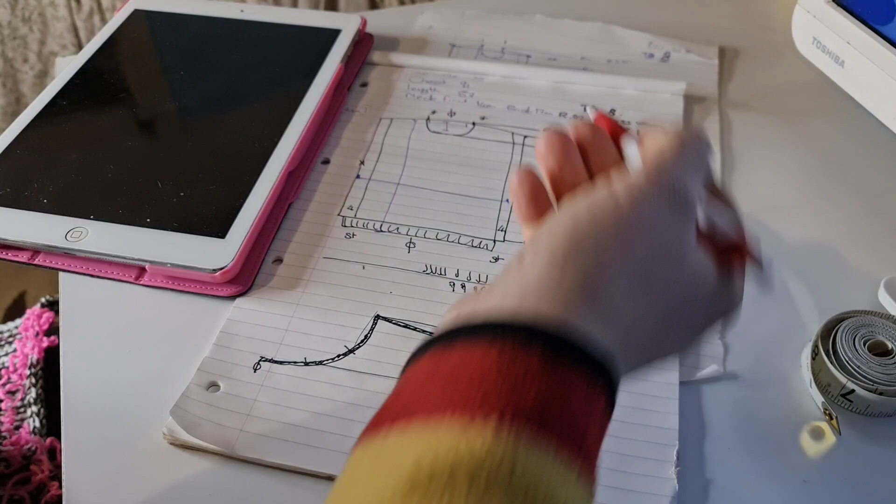Right, so what I really need to do now is turn that into how many stitches per 1 centimetre, which is quite easy. We put a decimal point in between the two. So 22 rows to 10 centimetres becomes 2.2 rows to 1 centimetre, and 1.5 stitches equals 1 centimetre.

Earlier on we took the measurements of my beautiful daughter, who's going to be the model for this, and we found out that her chest is 91 centimetres, the length of the garment is 57. We've measured the back width of the neck, the depth of the neck, depth of the armhole, and the amount of drop I want on the shoulder. It's quite simple when you work it out.

Now then, I just need to switch on my calculator on my device.

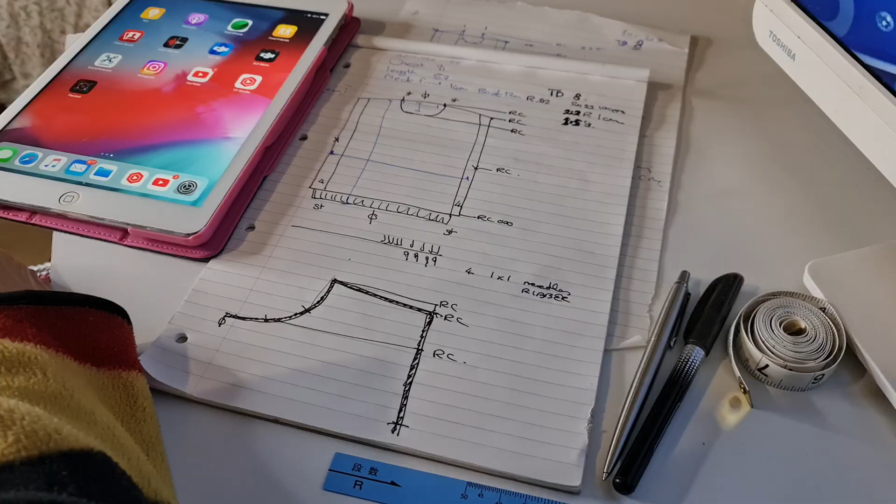So we know her chest measurement is 91 centimetres, but we need to add some ease. How tight do you want it, Lil? Do you want it loose or tightish? Medium. Medium. So we'll add, for a loose fit, we'd add 4 inches or 10 centimetres. Put that there so everyone can see.

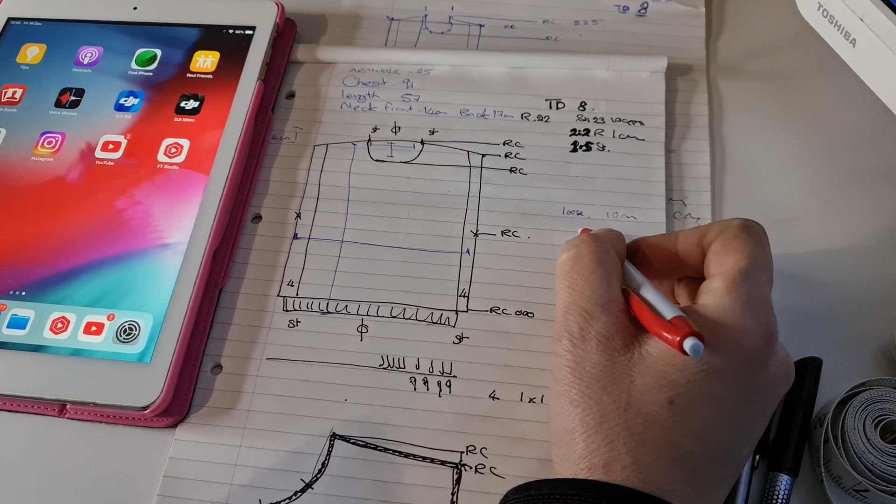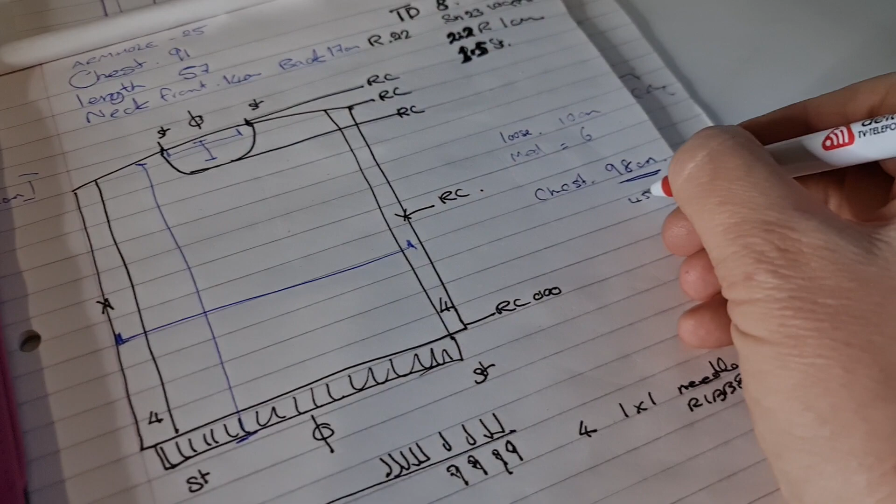So for a medium fit, I would say we'll add, let's have a look what 6 centimetres looks like. Now that's 6 centimetres if you want it medium to well fitting, because it's going to be a bit stretchy anyhow - this fabric's quite a nice give to it. So we want to add 6 centimetres, rounding up to 92 plus 6 for ease of maths is the chest measurement. I'm going to make 98 centimetres. So we know that's the whole width around, so we need to do half of it because we're doing a front and a back. So half of that is 45 plus 4 is 49. So the width of my jumper from side to side, including the ease, is going to be 49 centimetres.

We know the length she wanted was 57. So I'm going to add a little bit of ease because when it pulls around the body, we'll add a centimetre. So we'll want that from the nape of the neck down to the base of the cuff or the welt to be 58 centimetres.

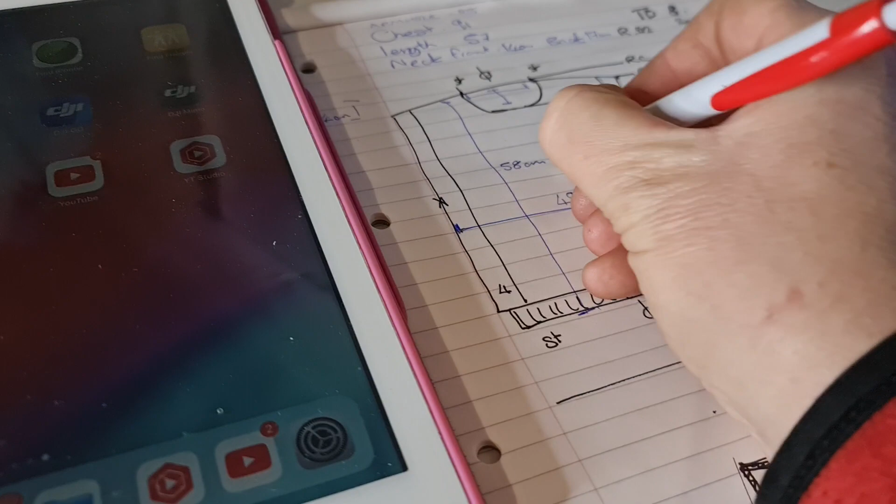Now the neck from front to back, let's see, the front depth here is 14 centimetres, and the width she wanted is 17. So we'll write 17 in there.

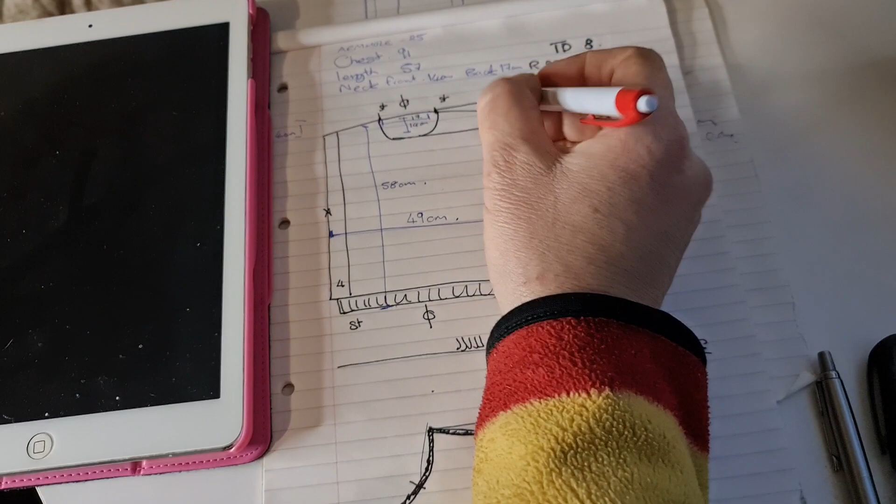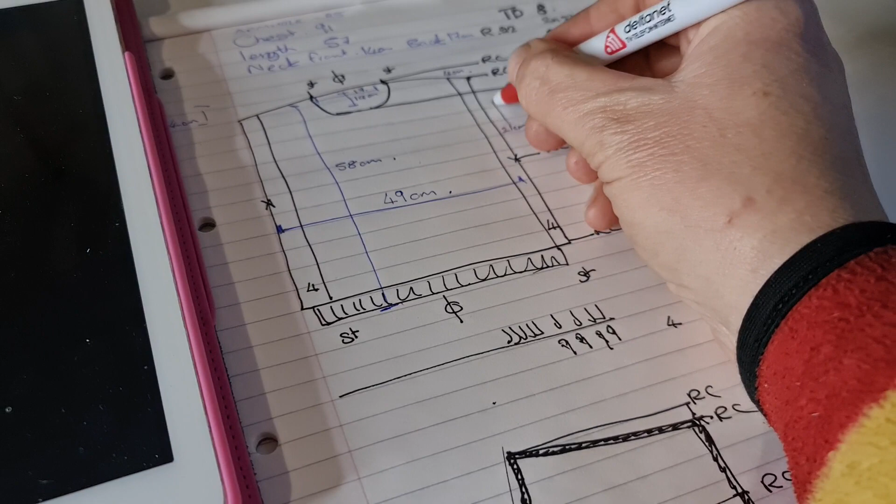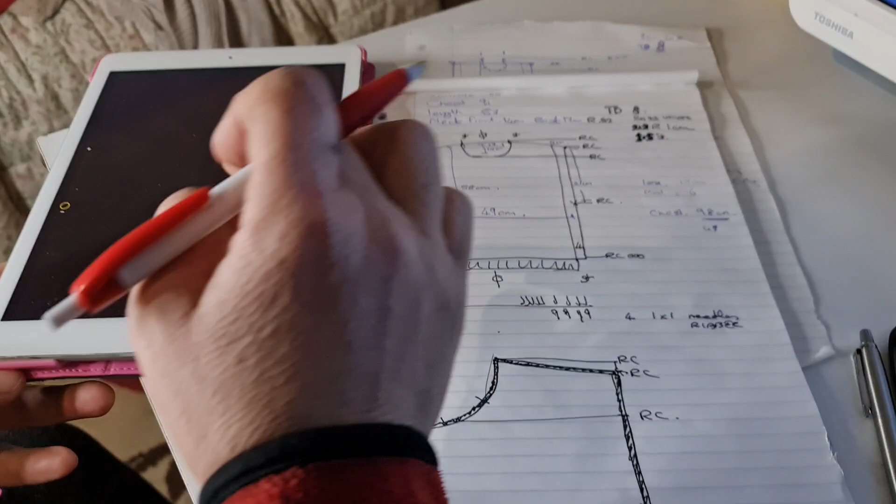We have all our measurements now, so all we need is to switch on our calculator that I've just freshly downloaded on my iPad, hopefully. Where is it? Let's have a look. We'll start with how many stitches first.

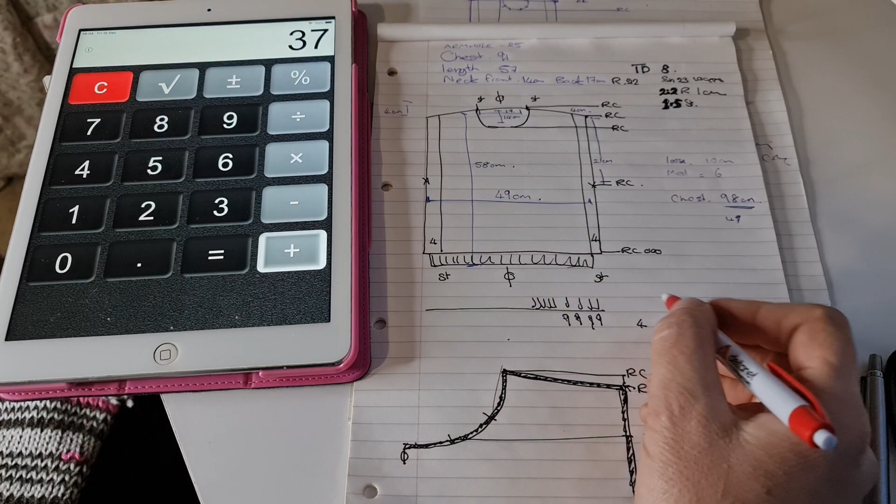We know the width of the garment is going to be 49 centimetres on the one panel, so we need to do 49 centimetres times 1.5 stitches. That's equal to 73, so we'll call it 74 stitches. Half of 74, divide by 2, is 37. So that tells us we need 37 stitches cast on.

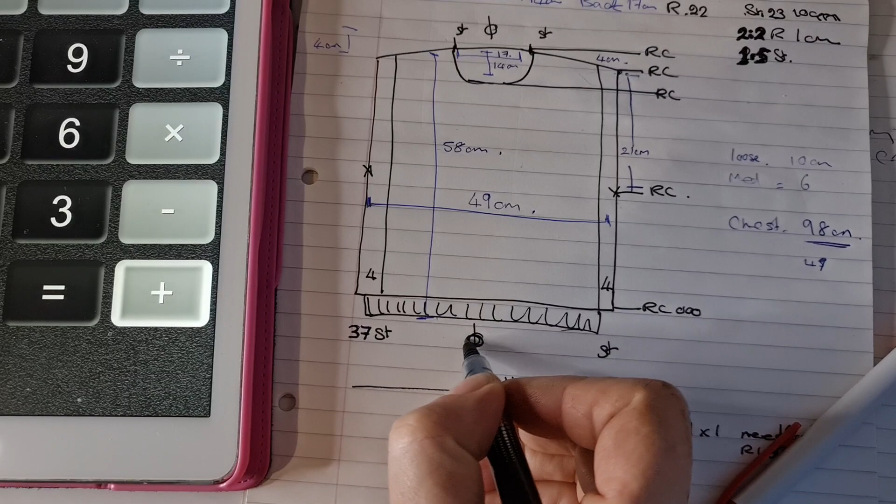Let's do this in black. 37 stitches each side of our centre zero point is our cast on.

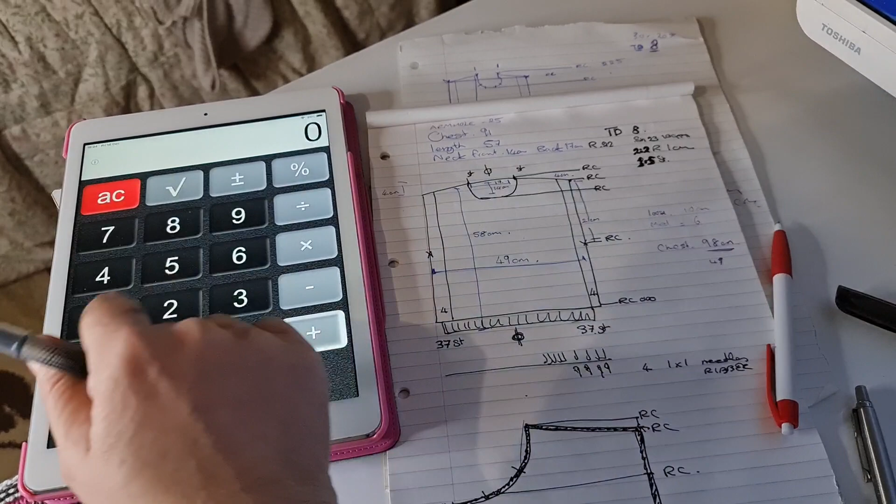Next, let's check out the width of the back of the neck, because we're doing the stitches for now. She wanted it 17 centimetres wide, times 1.5 stitches equals 81. That seems rather a lot, let me just double check that. 17 times 1.5 equals 25.5, I thought I'd made a little mistake there. So we'll call it 26.

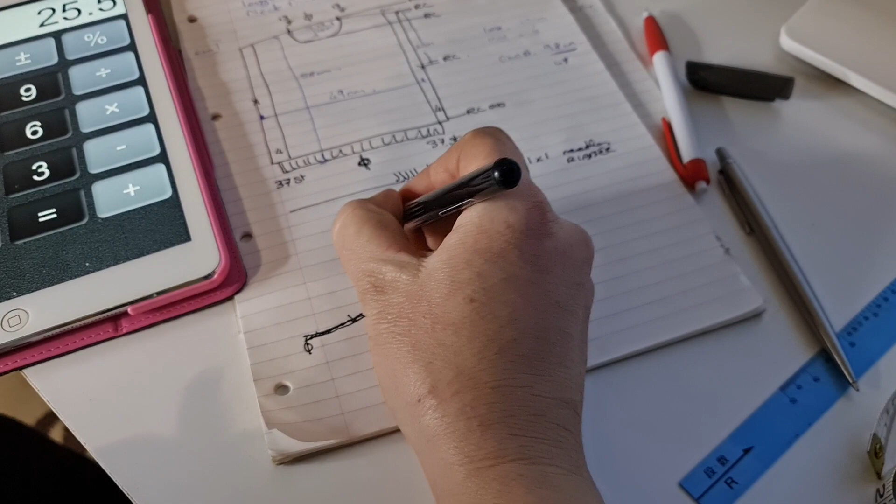So that gives us 13 stitches either side of the back of her neck, which is going to be the final width of the neckline. Now the depth, let's see, that's everything, and we put that here. So this is the neck, exploded neck - exploded neckband, that's good isn't it? That's the centre point.

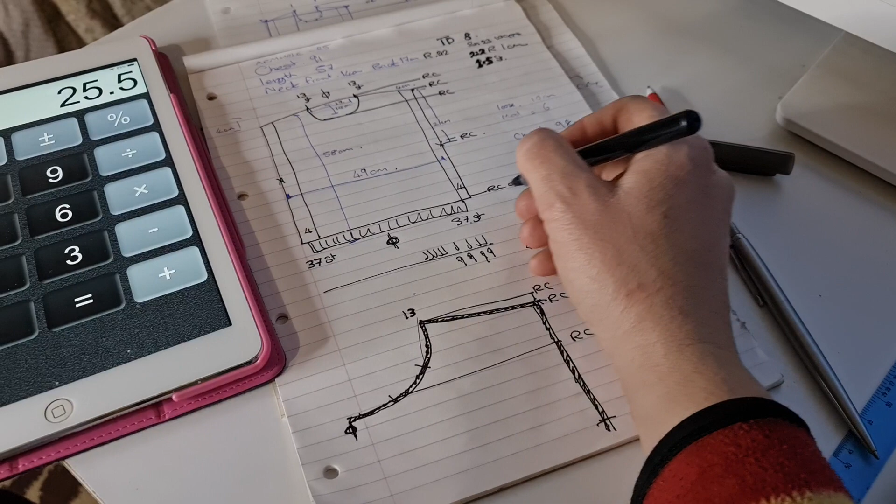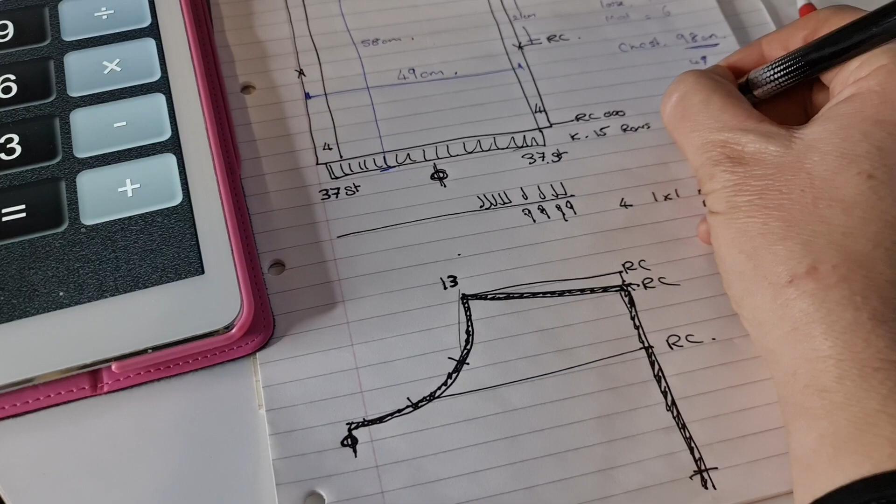Going back to this, we're going to cast on 37 stitches and we will knit. Did you like the depth of the rib before? How deep would you like your rib? Let's see, should we do it? 15 rows of rib. We'll knit 15 rows of rib, because I think that's quite a fair amount.

Then we transfer all of the stitches up, but this design here, if you look, this is my design for the garment itself. It's going to have 4 of the 1 by 1 - it's a 1 by 1 rib, so let's put 1 by 1.

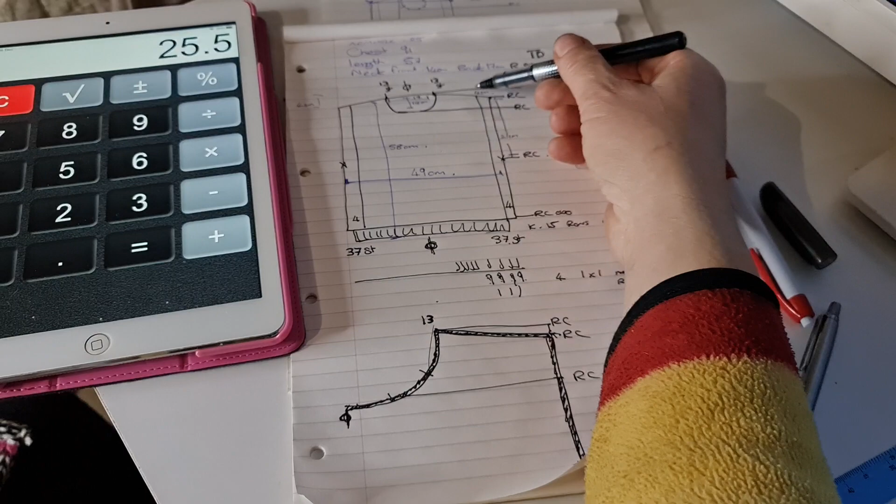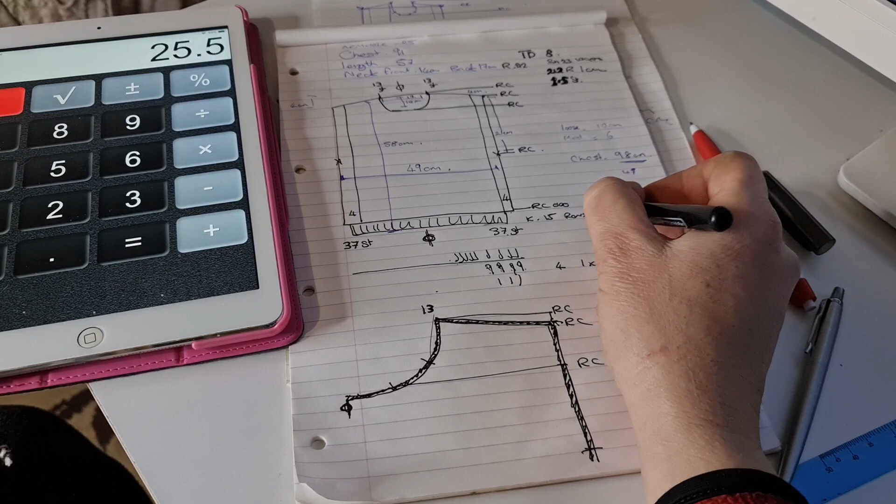4 needles at the bottom, 4 of the 1 by 1 bits, so that will be 1 back here, 1 back here, 1 back here. I want to leave those in pattern, so along the side here we have a small piece of ribbing going the length of the garment. So when we transfer all the stitches up here, transfer, we will leave this pattern of 4 either side left in work on the ribber, and we will leave the ribber connected and knit it as a rib.

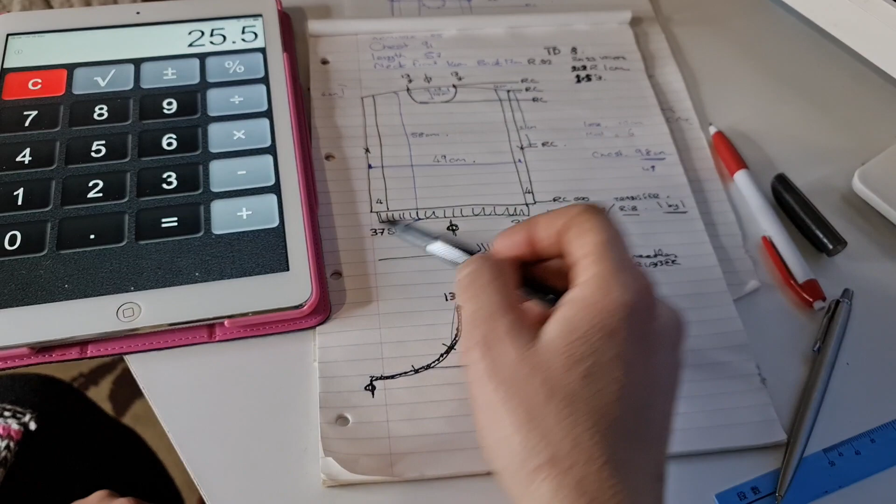Right, now we know everything we want. Now we want to know how deep, so let's have a look. She wanted it 58 centimetres. Back to the calculator, 51 centimetres times our row measurement for 1 centimetre is 2.2. So we go 2.2 equals - let's just double check that - 51 centimetres times 2.2 equals 112 rows.

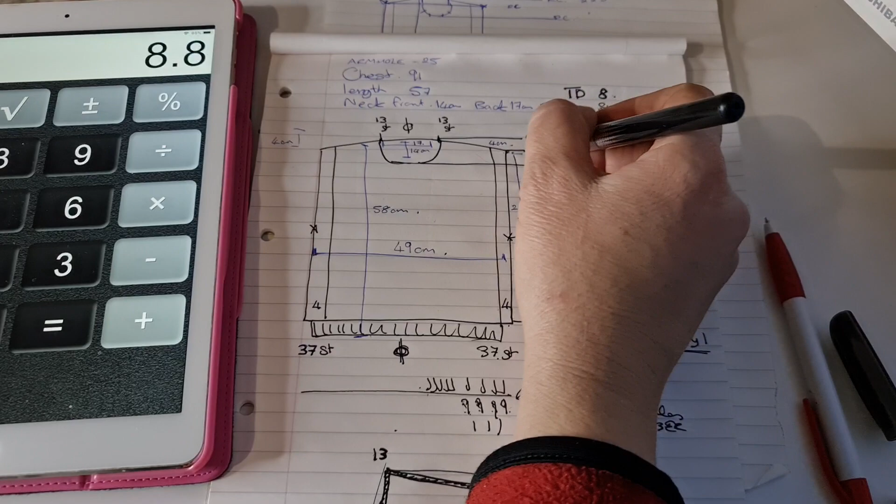So the total at the end of the nape of the neck is 112 rows. Now I know I want a 4 centimetre difference, the slope here, so let's just do 4 times 2.2 equals 9 rows, so we'll call it 10. So we'll stop knitting and start the shoulder decreases at row 102.

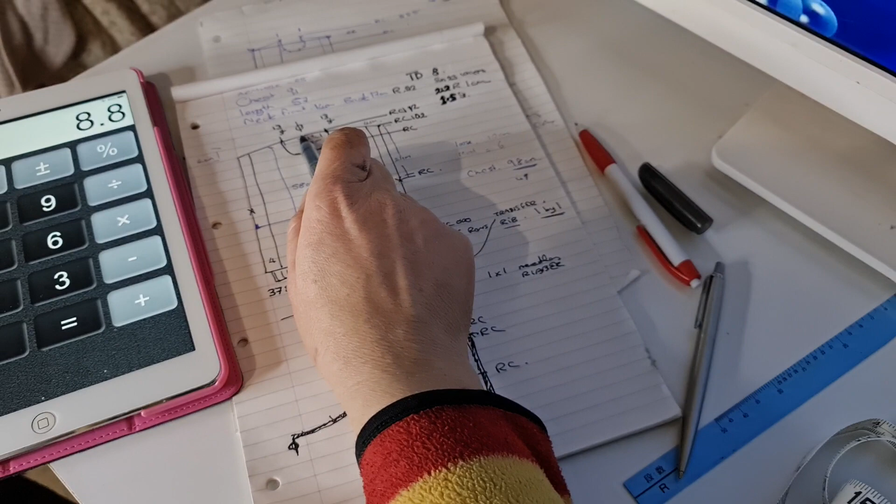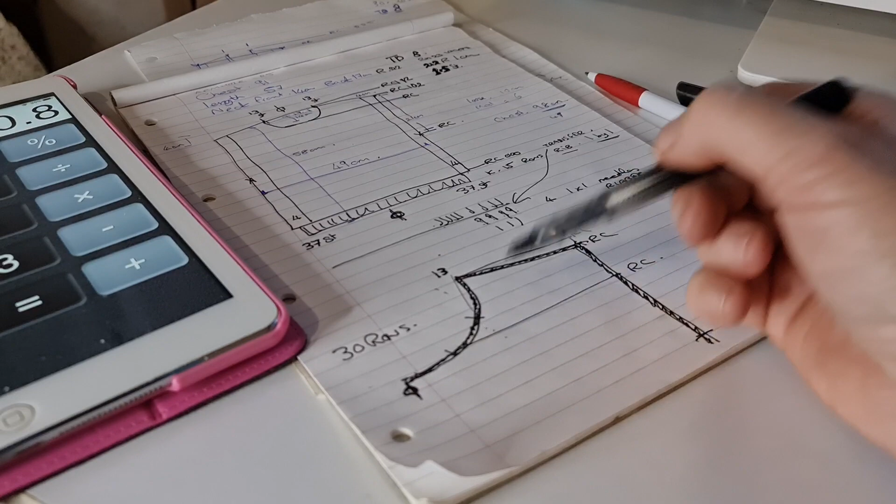Depth from the nape of the neck to the neck starting, 14 centimetres. So once again, 14 times 2.2 equals 30 rows. The depth of this is 30 rows, so I'm going to write down here 30 rows of neckband - you see, the neck from there to there. So we go to the exploded version.

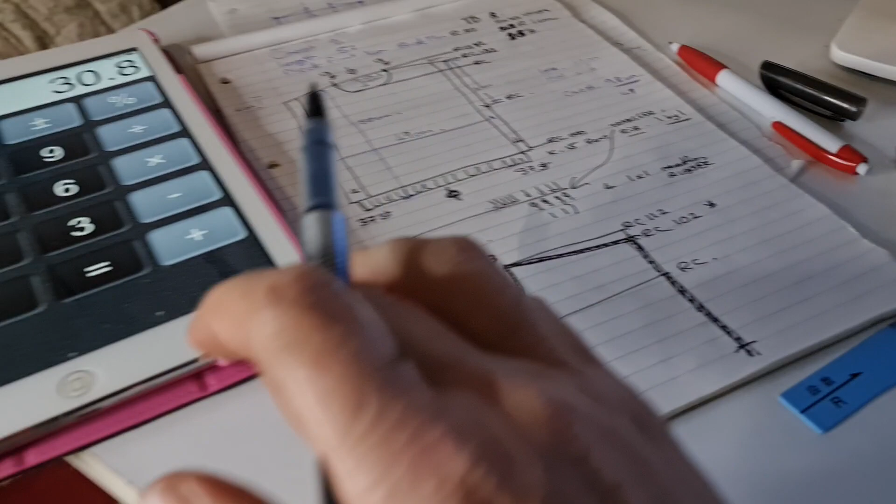102, that's the shoulder shaping, we'll talk about that there. And we need 30 rows, so we want 112 minus 30 rows equals 82. So we now know on row 82 this is the point the neck begins, neck shape.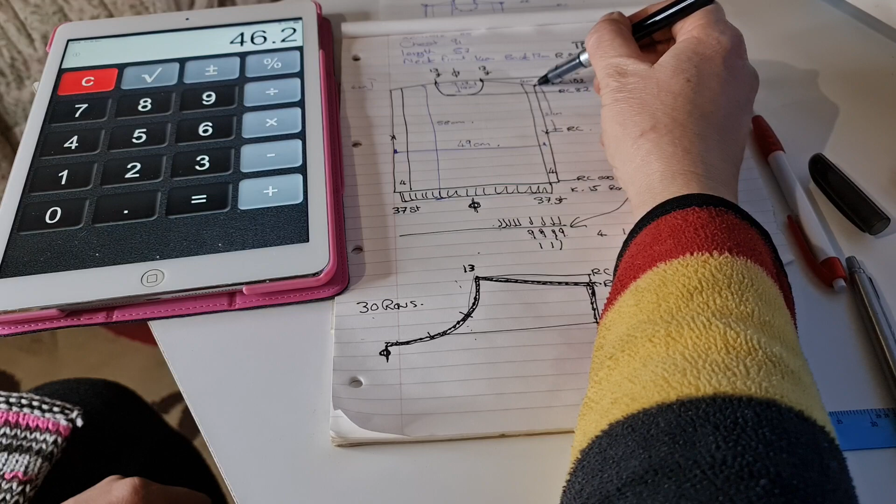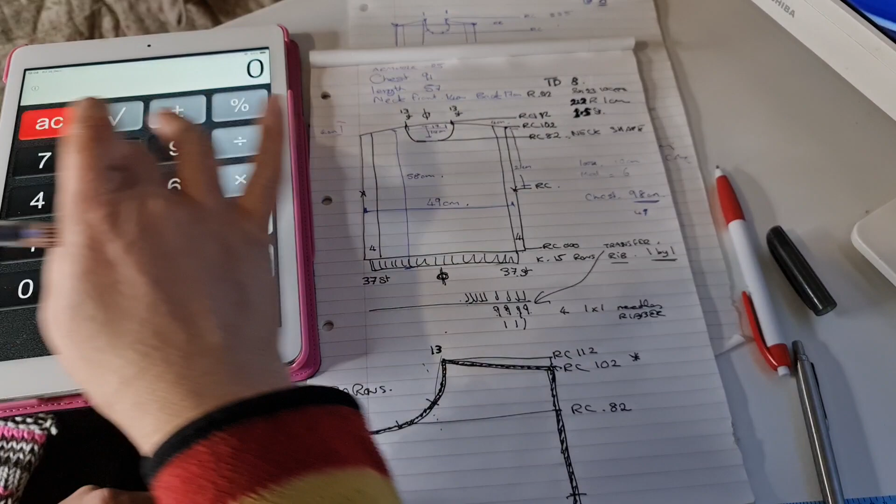21 centimetres down from row 102, she wants the armpit. So let's work out what 21 centimetres times 2.2 rows is: 46. So we know now that from the point of her shoulder down to the armpit is 46 rows. The point of the shoulder was 102, take away 46 - oops, I made a mistake. 102, take away 46 equals 56.

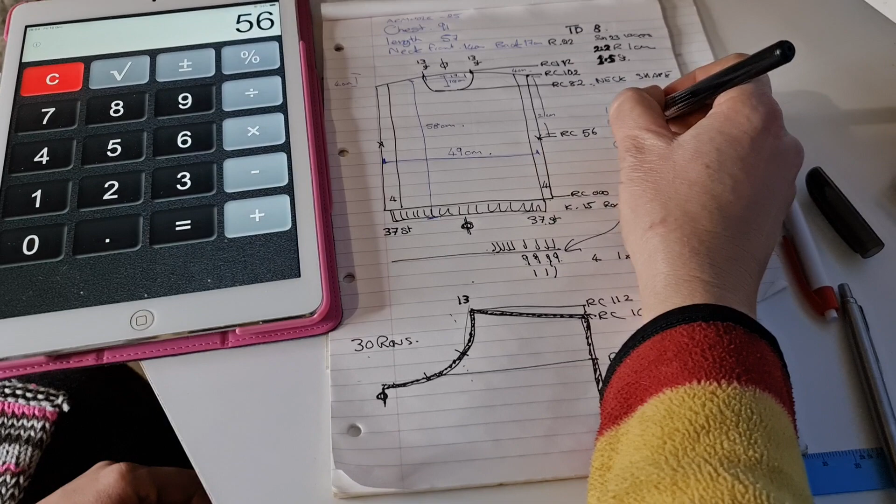So row 56, we're going to mark here either side. So we know when we're stitching it up, we're going to stitch up this piece only and leave this little piece open.

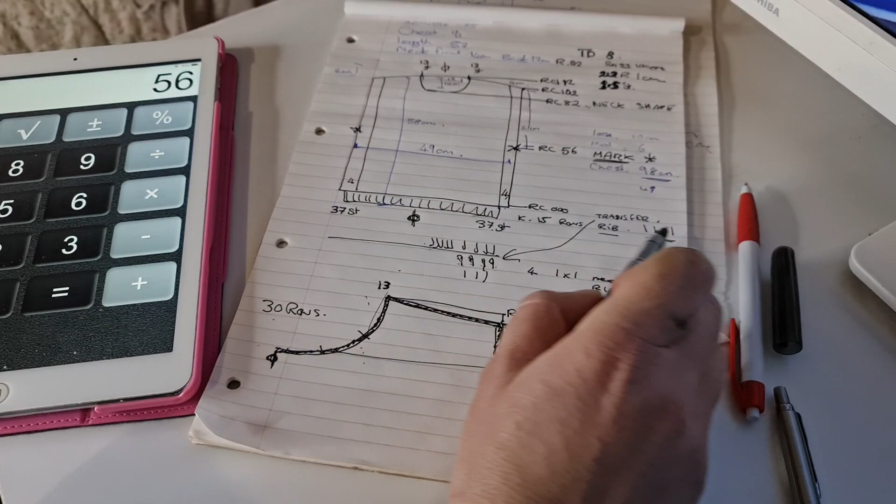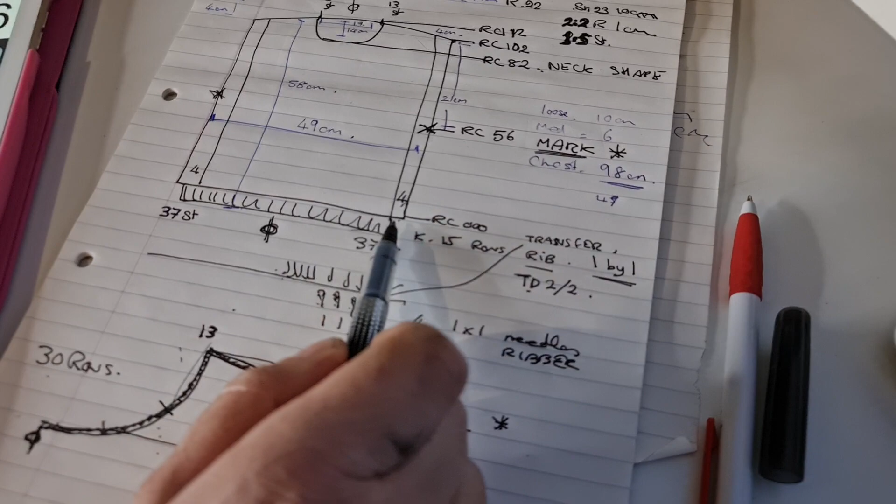Now, the neck shaping. So we now know we're going to cast on 37 stitches. We're going to knit 15 rows rib at tension dial maybe 2-2. We'll see - tension dial 2-2. Then we put the row counter back to 0 after transferring our stitches, leaving 4 in work and leaving the ribber connected. And we will knit over those 37 stitches each side at our tension dial 8.

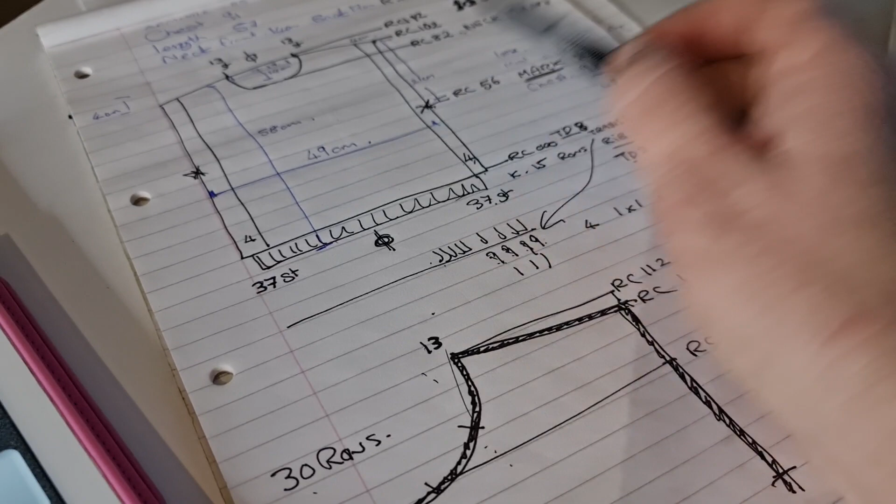Up to row 56, on row 56 we put a yarn in each side and mark so we know our stitching up point. We continue knitting the back until we get to row 102 where we start our shoulder shaping.

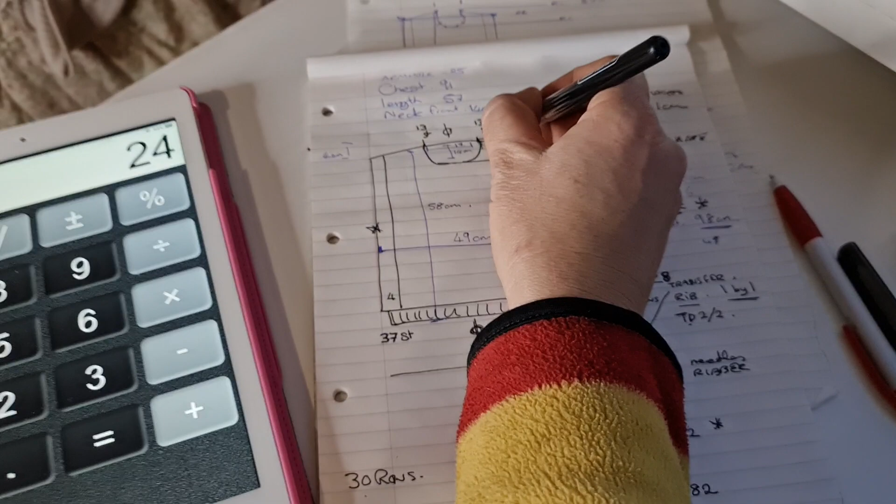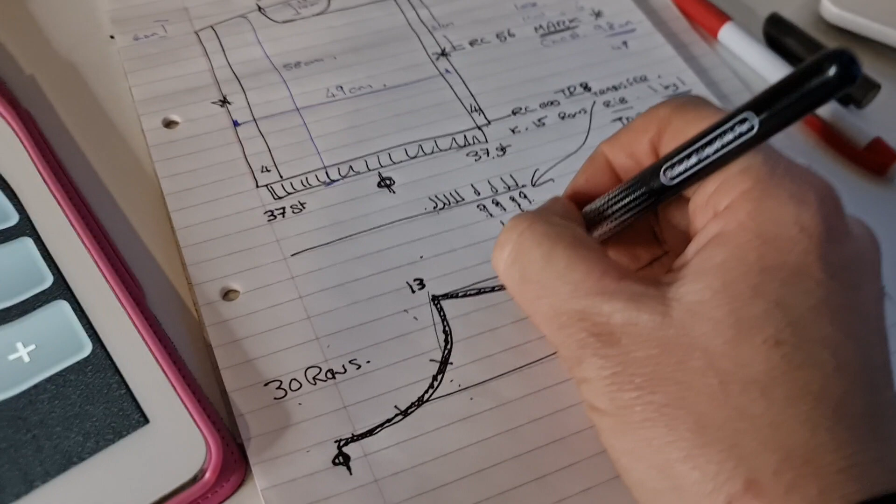Now then, I need to know how many stitches to do the shoulder, from here to here. So let's work that out. 37 stitches we know we started with, and we're going to take away 13 stitches, which leaves us a total of 24 stitches to get rid of in how many rows did I say? 10. So let's put a little note down here. We've got - no sorry, 24 stitches.

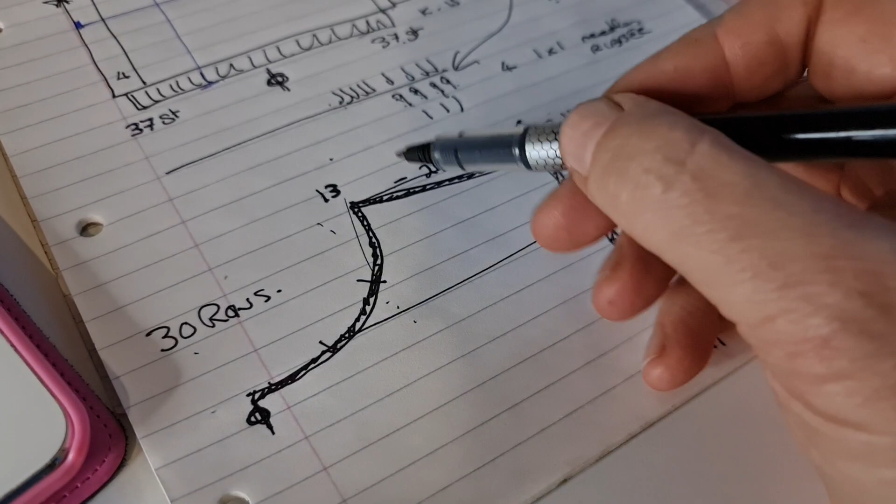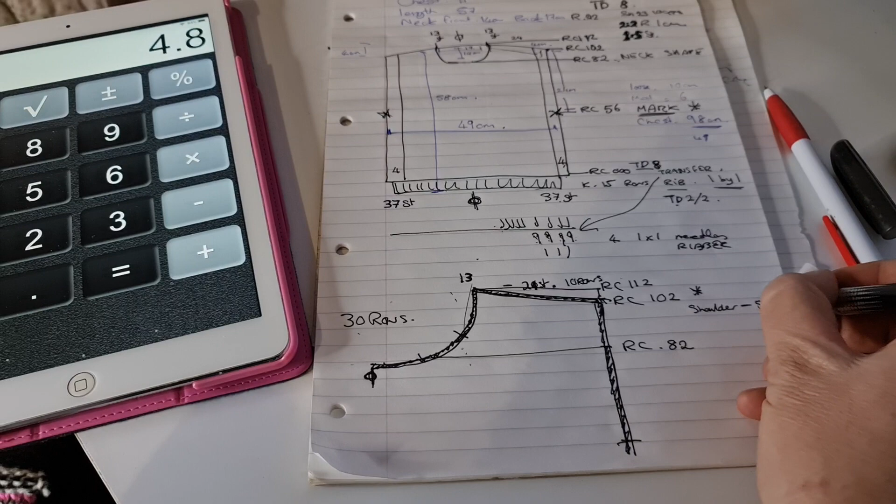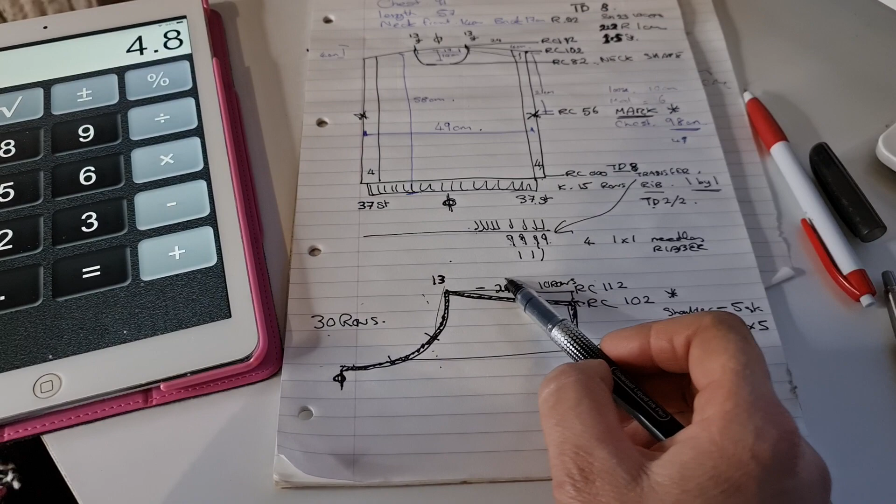Minus 24 stitches in 10 rows. So I'm just going to divide that up. We'll do 24 divided by 5 equals 5 nearly. So what I will do is put into holding position. So for the shoulder shape, minus 5 stitches, knit 2, times 5. Now on one of them it's going to be less at the end, so we're going to have 5, 10, 15, 20 and 4. 5, 10, 15, 20 and 4. Yeah, that will be right.

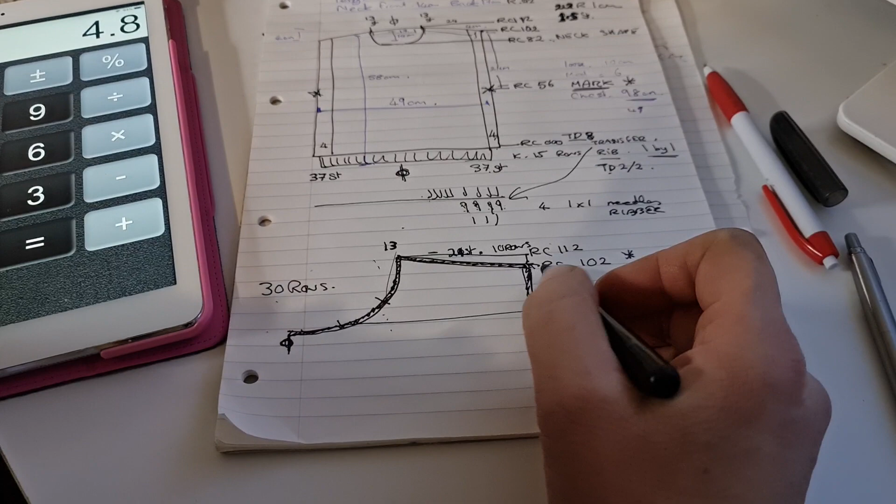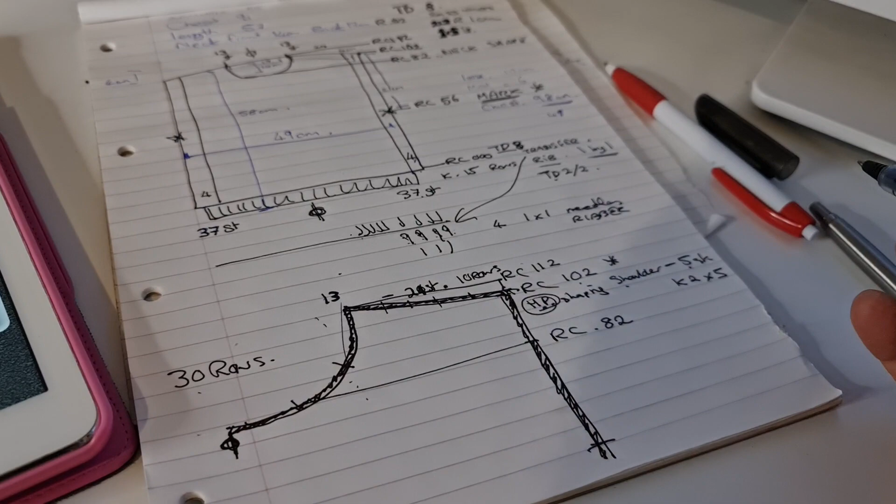So just to recap, on row 102 we're going to put 5 stitches into holding position, so we're going to do holding position shaping: 5 stitches, knit 2 rows, 5 stitches, knit 2 rows, 5 stitches, knit 2 rows, and on the last one we'll be left with 4, and that will give us a nice shape in holding position, and I will show you how to do that.

Let's get on with this neckband.

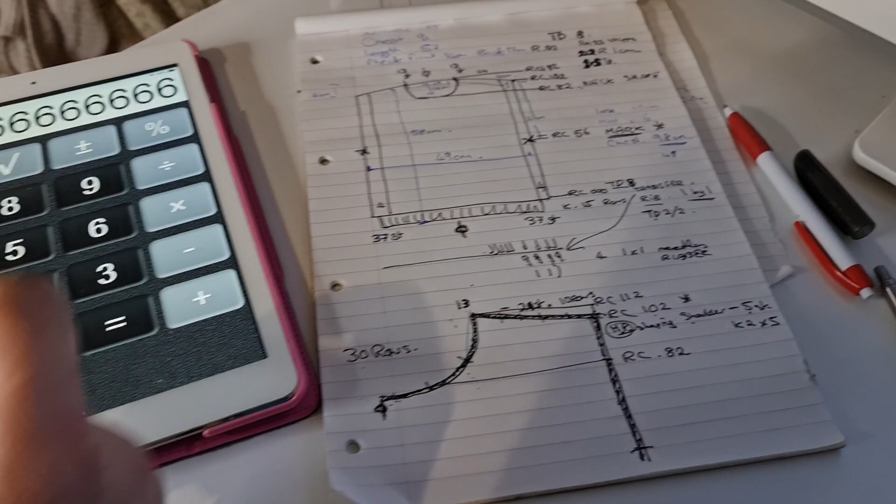Now then, to do the neck, I like to work in 3s around a neck. So we know we're getting rid of - no sorry, 26 stitches. So let's straight away start by dividing 26 by 3. That's about 8.6 stitches. So in the beginning, I am going to take away on the first bit here, 8.

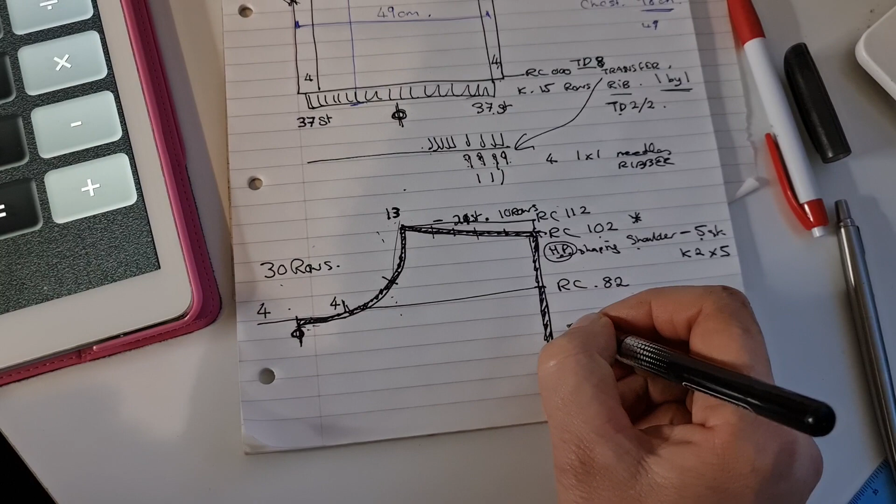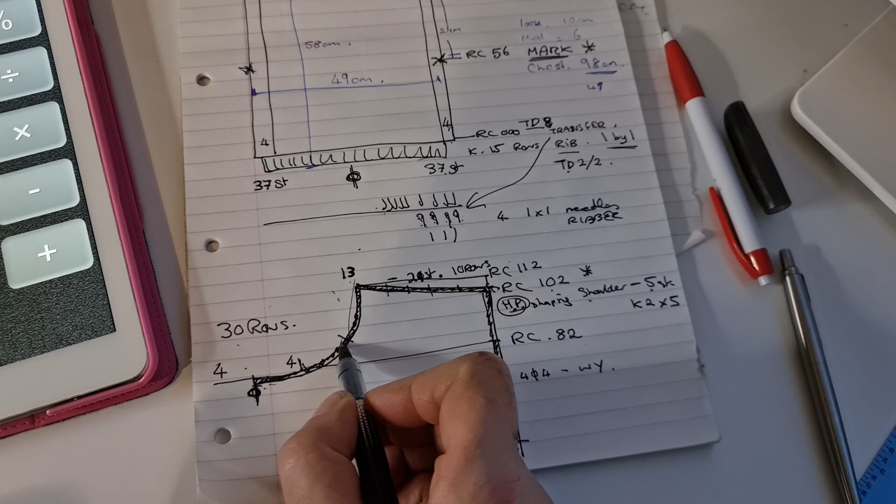Let's put 8 stitches, so that's 4 each side. We're going to go into holding position here. So first on row 82, so 4 each side of center, waste yarn. Next, we've got another 8 to remove here, I think. Let's see - yes, so 4.

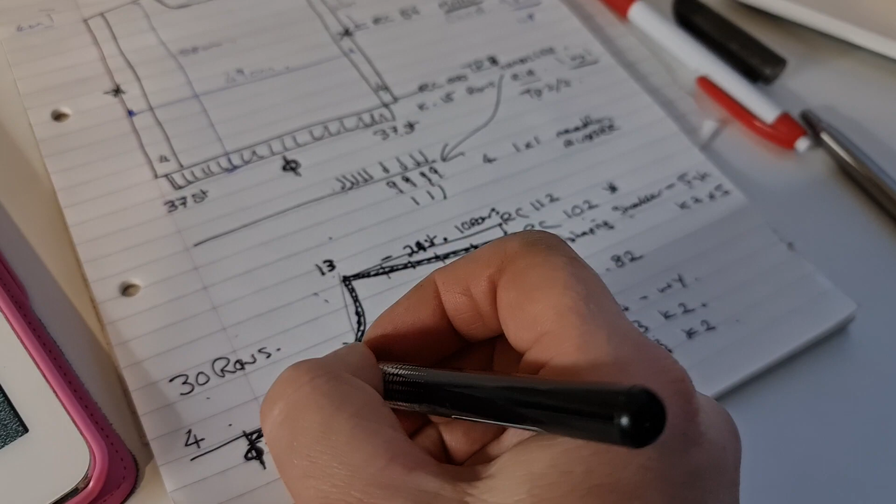What we're going to do is take them off quite steeply firstly. So we'll go minus 3, knit 2. That's 4, 5, 6, 7. Minus 3, knit 2. 7, 8, 9, 10. That's looking good, so that leaves us - that's this piece done. So we've got a sharp decrease here: 3 and 3 have gone.

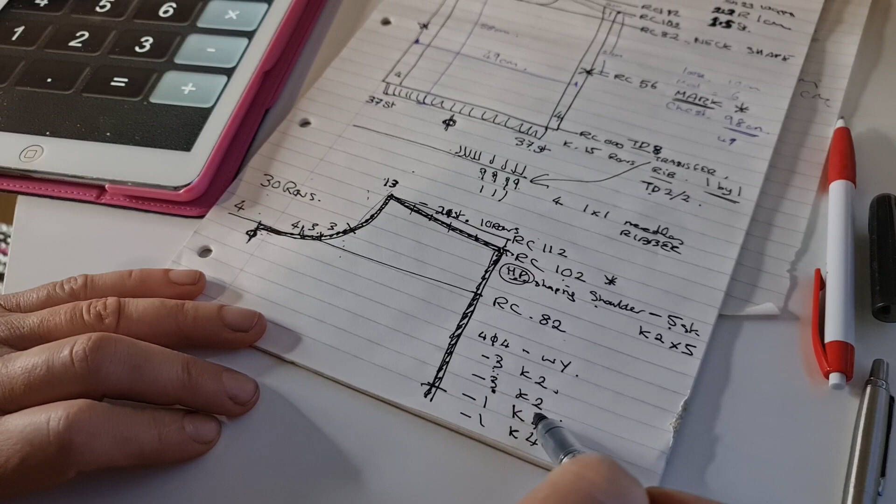That's going to leave us - what did I get to? 4, 5, 6, 7, 8, 9, 10. 3 stitches to remove. So then we're going to do minus 1 stitch, knit 4. Minus 1 stitch, knit 4. Let's just check how many rows we're getting rid of here, because we've got 30 rows. Let's see, 2, 4, 6, 8, 10, 12, 14. This is good. So minus 1 stitch, knit 4.

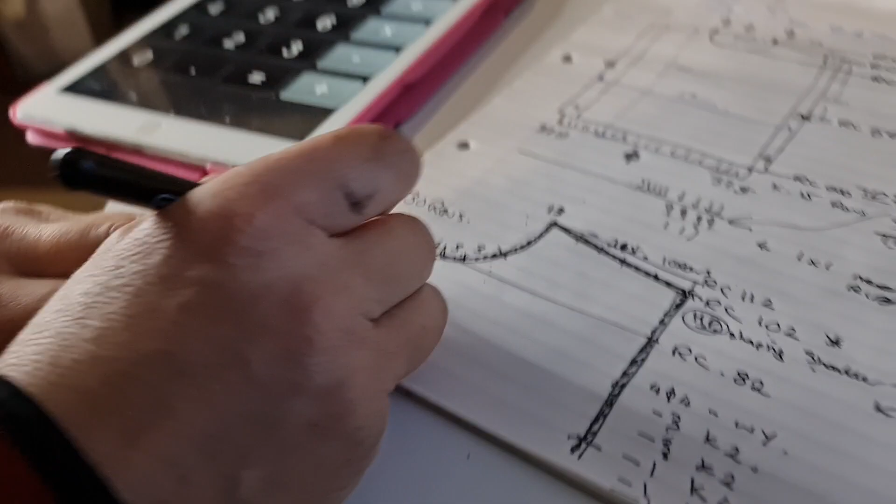So there we go, that is my neck shaping. So let me write that clearer for you. In the center, on row 82, we're going to take away 4 each side. On row 80...

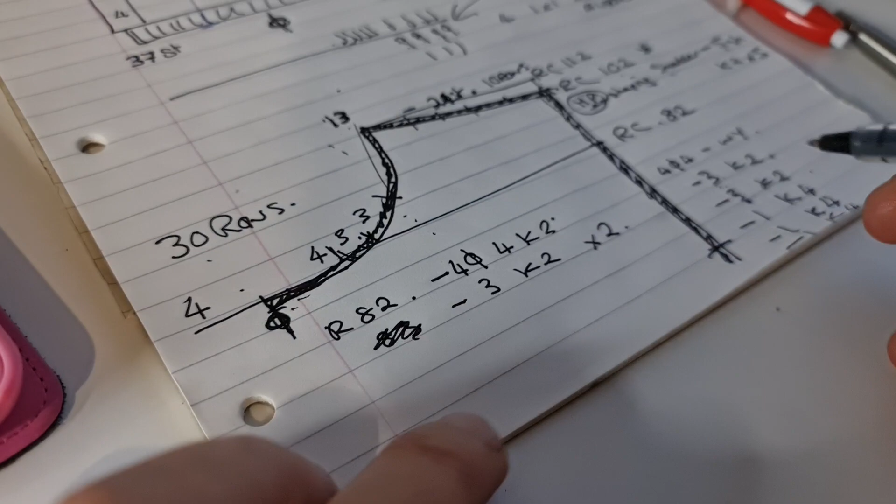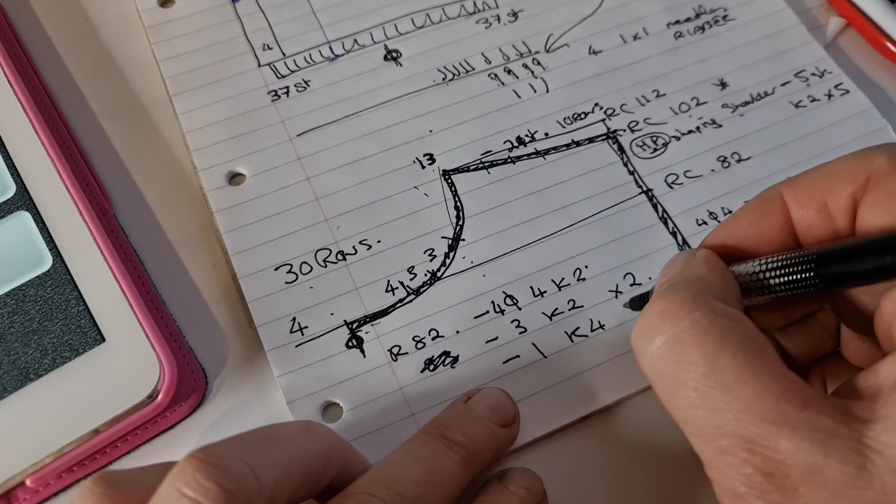Let's see, next one, 83, we're going to minus 3, knit 2, and we're going to do that 2 times. Let's see, we're going to knit 2 there, take away that bit. So that's 4, 5, 6, 7, 8, 9, 10. Then we're going to go minus 1, knit 4, 1, 2, 3 times, times 3. And that will remove 4, 5, 6, 7, 8, 9, 10, 11, 12, 13 stitches. That is a total of minus 13 in total.

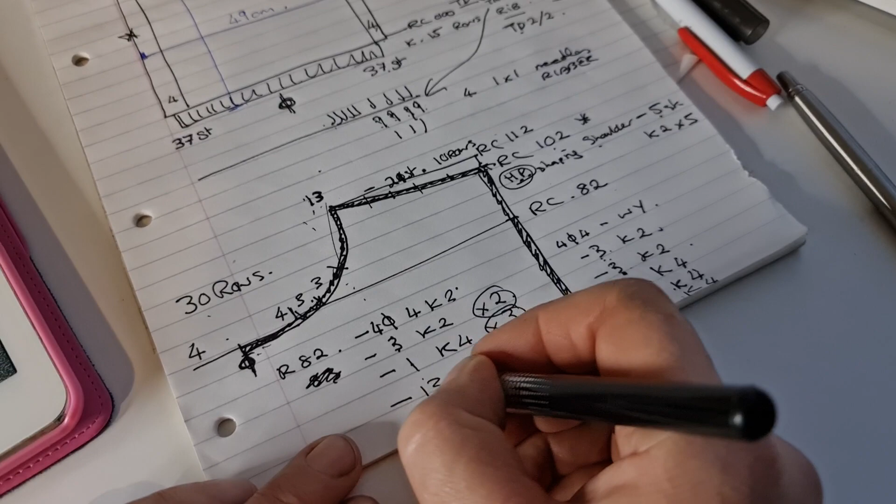Once we've finished that, we're going to continue knitting to row 102, which is where the shoulder starts. Knit to row counter 102, and shape shoulder.

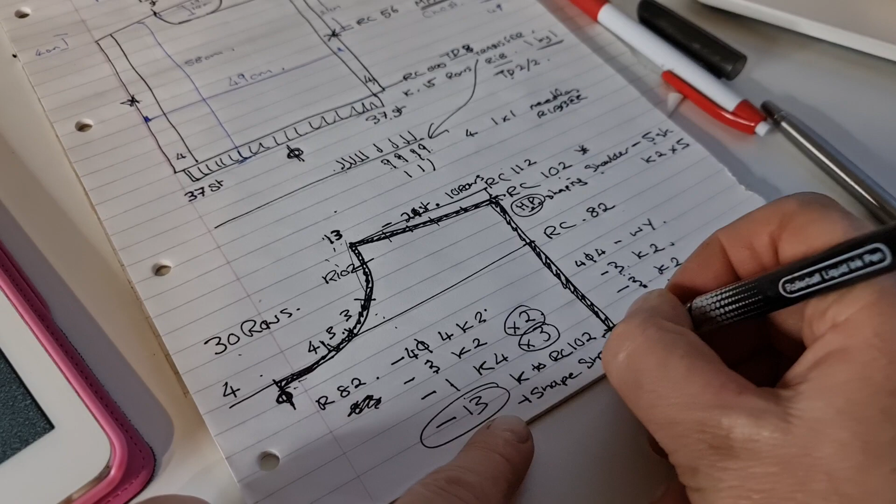Right, let me just go through this with my little head. We'll put it on pause and I'll check I've done it correct for you. So I've tried to write it a little clearer for you. I hope you get the gist of what I was explaining.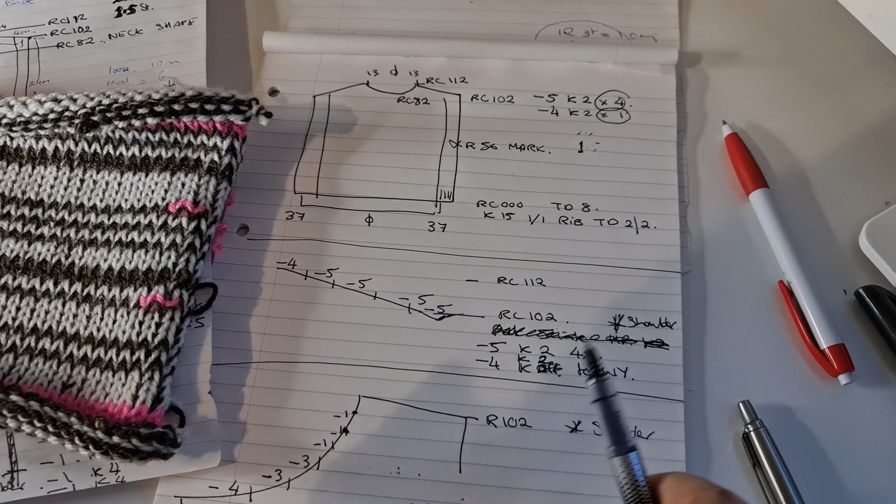Lily, did it sound understandable? No. Oh, good. Not in the slightest. Not in the slightest. Well, please comment and let me know if you understand what I'm suggesting.

So the pattern that I've now ended up with is cast on 37 stitches, and I knit my rib, which I've chosen to be 15 rows. A 1 by 1 rib at tension dial 2-2. My row counter will go back to 0, and we will put that on tension 8.

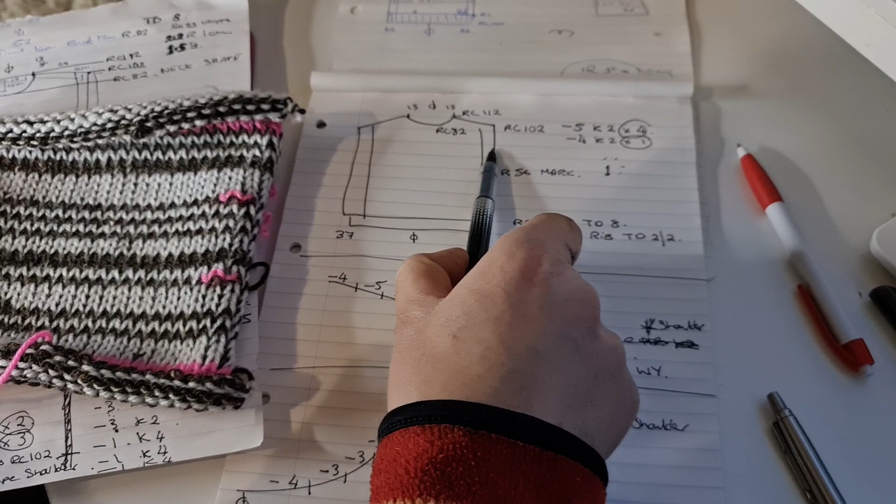I'm going to knit 56 rows, and I'm going to mark each side so I know where the armpits are. And if I'm knitting the back, I knit straight to row counter 102, where I start my shoulder shaping, which is minus 5, knit 2, 4 times, then minus 4, knit 2 once, and that's the end.

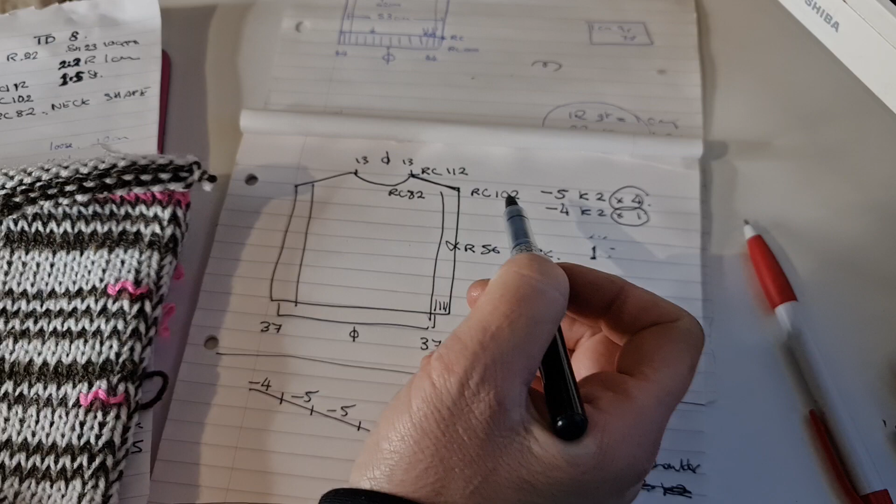And now this piece here will be in holding position or cast off, whichever method you choose. That I will put onto waste yarn. Then this piece here will go onto waste yarn separately, and this piece here will go onto waste yarn, but that will be explained more in detail as we knit it.

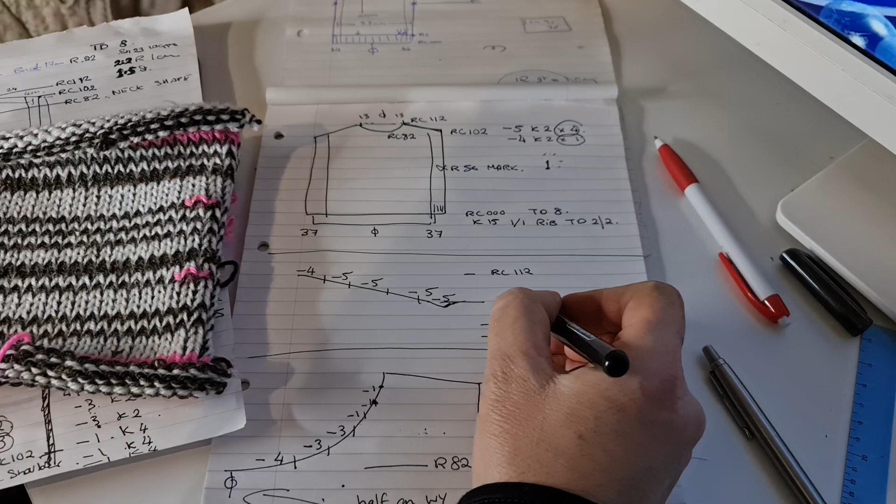I've written the shoulders here clearly for you to see what to do. Row counter 102 is the start, minus 5, knit 2, 4 times, minus 4, knit 2, and throw it off onto waste yarn. The neck shaping.

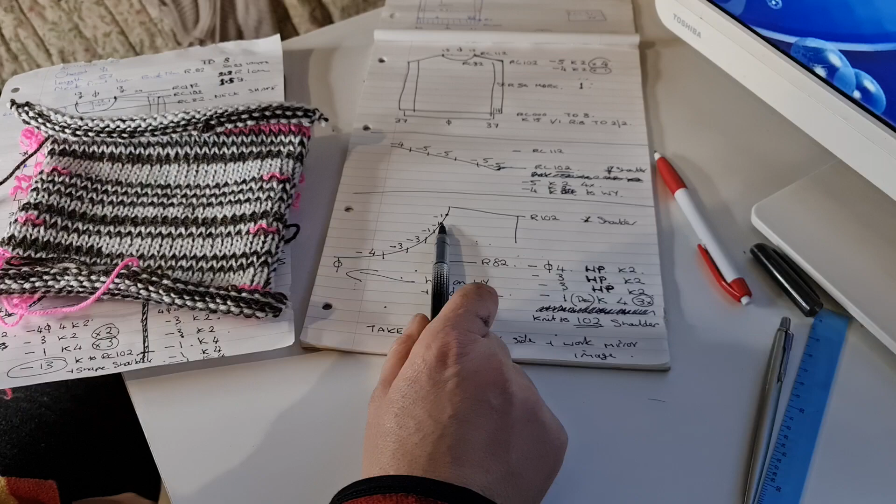I choose a mixture of holding position, waste yarn, and decreases to do my necks to get the perfect neckline. So I will explain more when we're doing that neck. We'll probably do a whole video on that. So let me just do a quick show of what I've done with my maths.

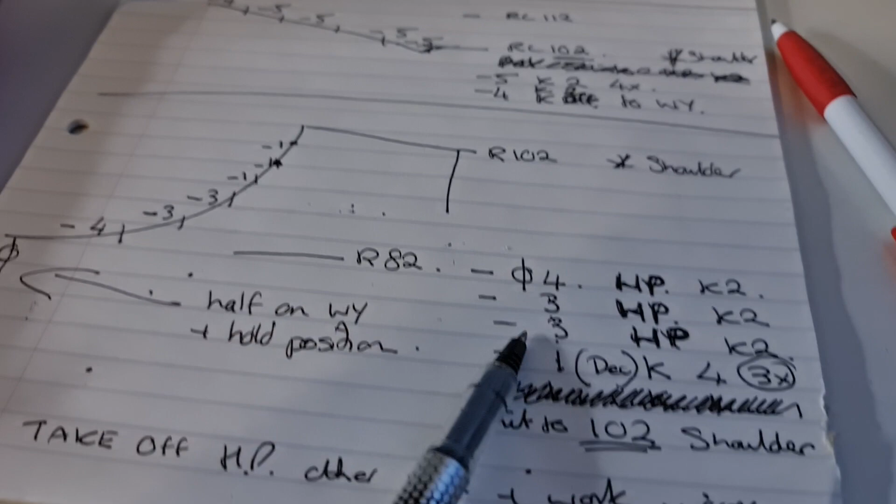On row 82, that's after marking row 56 up here for the side, we knit to row 82 and jump down to look at the shaping. Each side of the center, that's what that 0 with a line through is saying, we're going to take 4 stitches each side of 0, and we're putting them into holding position.

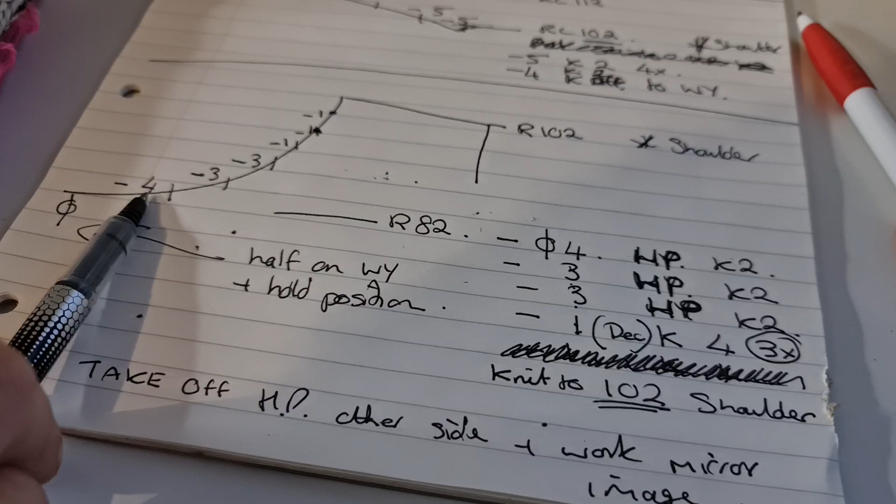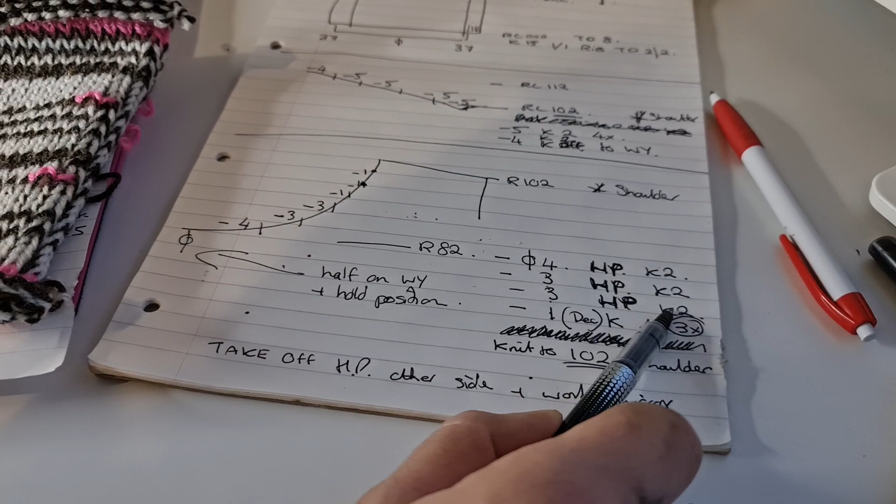Then we're going to knit 2 rows. We're going to do 3 into holding position, knit 2 rows, 3 into holding position, knit 2 rows. Then we're going to take away 1 and knit 4 rows, and we'll do that 3 times. Now there's a little more to it than that. As you know, with holding position, you have to do it slightly different to make it happen, but I'll show you that when we get there.

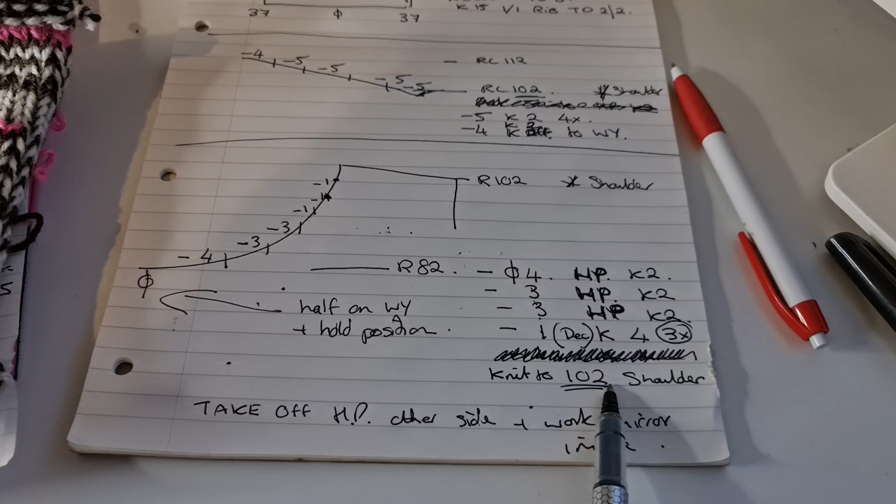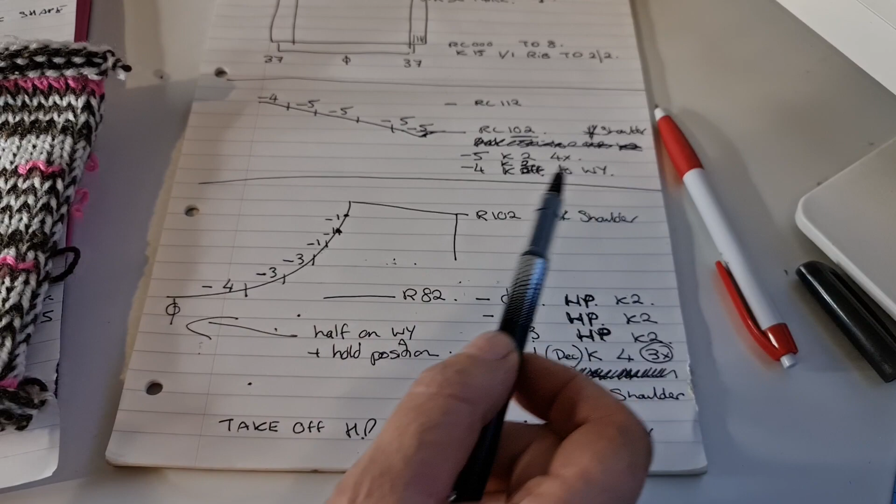Once we've done that, we're going to knit to the shoulder point at row 102, and we're going to go back up to here, the center, and follow the shaping for the shoulder. And once we've done the shoulder with holding position, that piece will come off onto waste yarn. Then we will put that to one side. All of this here will be knitted off onto waste yarn. And we will do exactly the same on the opposite side.

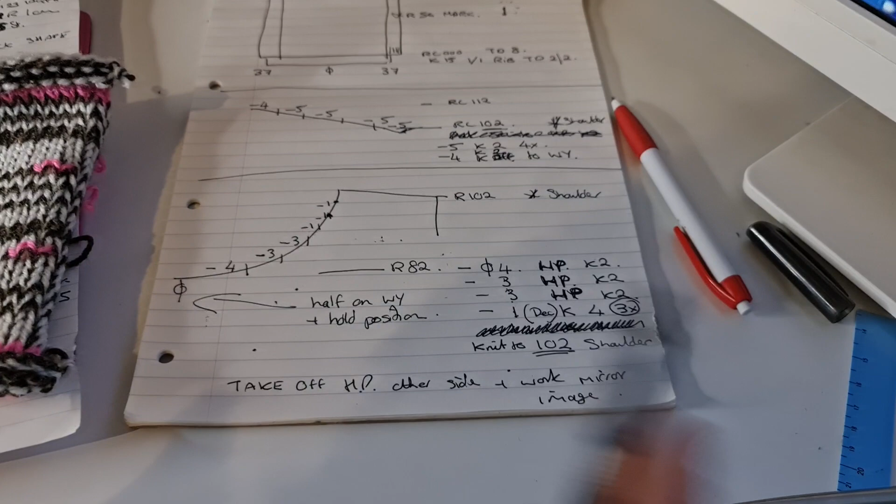It all sounds rather complicated, I'm sure, but this is how you write a pattern. Start really basic and come along with me on the journey. I will show you how it's done. This is part 2 of how to create Tabitha Tabard. And let's just have another little look at what she looks like.

My own design of how to do a simple starter jumper without sleeves, simple stitching up, 4 buttons on the side on each side, making it look nice. Nice bit of ease, a good thick neckline. I haven't written about doing the neckline in here. We will do that. This is the yarn we're doing. Instead of that variegated lovely brown, we're going to do strange stripy cream and brown.

Hope this helps you. Join me for part 3, where we actually get to do the knitting, get the pattern happening using a ribber or whatever you've got to do it with.